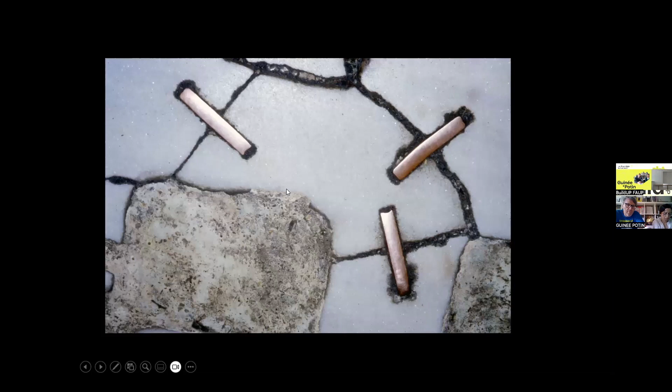After finishing school, we started to work in different practices that interested us in research and architecture. Excuse me. I worked for Christian Hauvette in Paris and Hervé with Edouard François. We began by working in architectural offices, and in parallel, we participated in competitions and we won several research awards with foreign residency grants, through Italy at the Villa Médicis.

These trips made us aware of the richness of vernacular and local architecture, and that in the end, we didn't know our territories in Western France very well. It was through traveling abroad that we became aware of our own territory. Those influences put together inspire our design through main ideas: mix natural and artificial, mix sophisticated form and rough form, mix hard and soft.

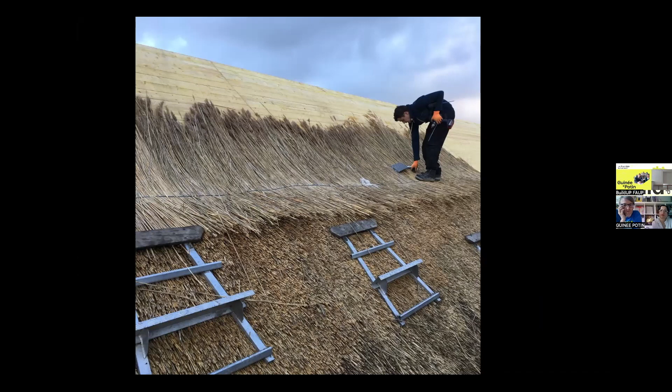The third project that we have achieved recently is a low carbon school in Saint-Pabu in the west of France, Brittany, which is entirely covered with thatch roof, as you see on the picture, with wood structure and wood insulation. That means the project is actually very low carbon and needs less energy to survive and to work, notably in the winter.

So when we think of building housing, we need time to test plan, materials, its properties, story, geography, and vernacular aspects. So we need that time, and when we think about building housing, it's the same when we build equipment, for example. We try a lot till we find the right one, the fitting one.

We're going to begin to present you three projects of collective and affordable housing. If we have time, we're going to begin a fourth one. It will depend because we have a lot of images to present, but I think it's okay with the time.

The first project is near Nantes, in Rezé, in the south of Nantes. It's a big project of 105 collective and affordable housing in the neighborhood called La Jaguère. The project is located in the new district of Rezé, in the south of Nantes, rich in a geographical location and strategic landscape. The challenge of the project is contributing to the writing of the identity of a new district, as you can see on this aerial view during the construction.

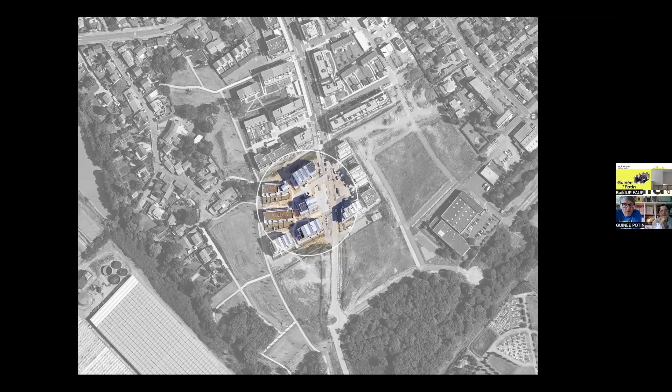On the west of the image, you can see a big greenhouse, and also a district of little houses, also on the west, and on the north, it's more collective housing. And in the mass plan, you can see that we have decomposed the project in 6 buildings. The project is composed like a hamlet, where residents move from the urban to the open countryside through notions of neighborhood life, private gardens, food space, and communal space.

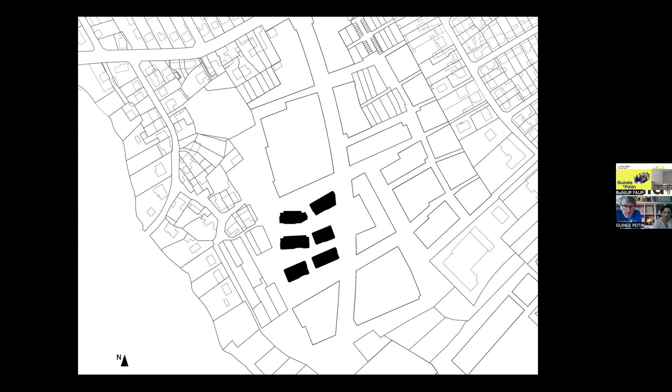And as an extension of the work of fine integration of construction in the topography, vehicle access in the block will be limited to reinforce the concept of undercover park and accompany the walker towards the large landscape. The aim was to eliminate the cars from the site and to let people walk on the landscape, and make the link between the urban part of the district on the east to the landscape on the west. The surroundings of the buildings become space for crossing, meeting between locals and visitors.

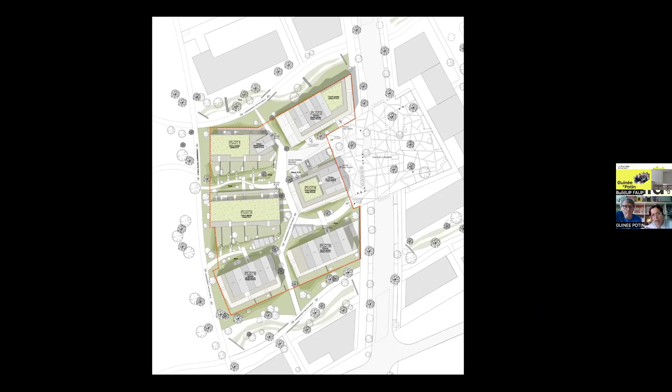So in the mass plan, you can see the 6 buildings, the place of the new neighborhood on the east, and the old district on the west with landscape and old village. Initially, the urbanist wanted the cars to go more inside, and we said no, we didn't want to do that. So there was a little fight, and finally we got the cars to stay on the outside and the pedestrians to stay inside.

Here is an image of the competition that we won, where you can see the alternance of stripes of building and stripes of landscape. That was the goal of the project. Given the large number of dwellings, 105, we have sought to achieve a low density by dividing the program into 6 small buildings so that the parkland permeates the plot. This subtle variation of size is accompanied by a volumetric composition alternating linear volumes with more compact volumes, so as to realize the programs without there being an immediate perception between free accession, affordable, or social housing.

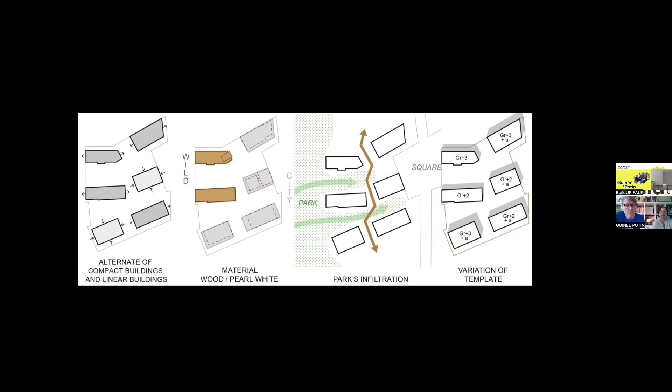2 materialities surround the buildings. To the west, 2 buildings in direct contact with the park are a wooden frame in Douglas. 4 buildings to the south and east, more urban, are covered with pearly white paint. That's the expression of the scheme that you see on the screen.

Here is the plan of the parking. We hide the car, and as Flore told, we hide the car under the building to preserve a natural park in the open ground, in the strip between the buildings, alternating built and landscape stripes. So we preserve the ground, and we can have very good plants between the buildings.

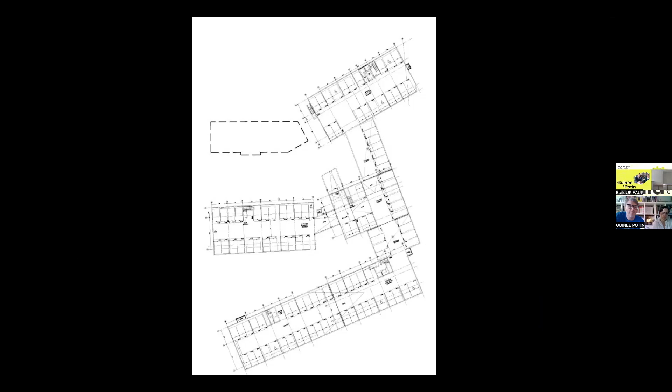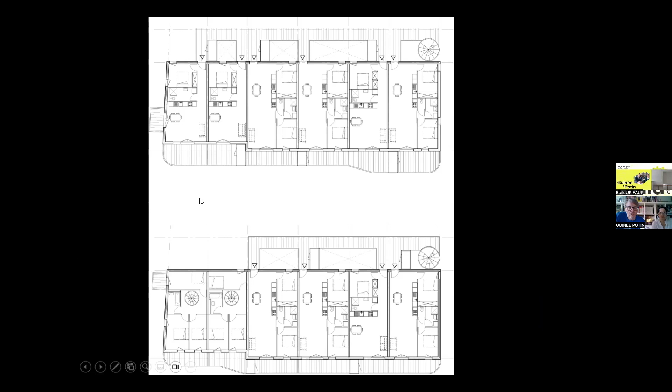We have varied the types of housing: duplex on the ground floor, walk-through or double orientation housing, attic houses, and so on. So this is the plan. You can see there are some duplex or double crossing homes. And there are also in the attic some perched housing that are like houses on the attic.

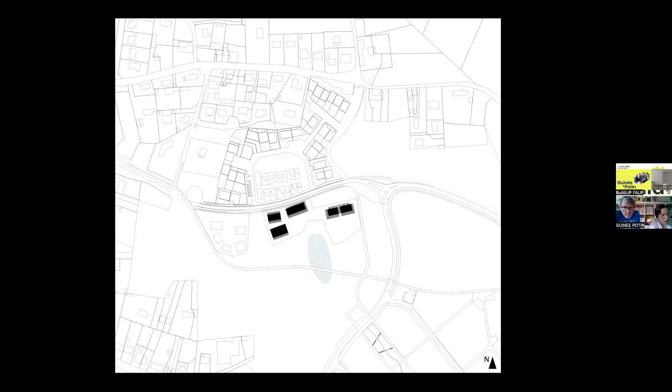A passive residence is a dwelling that is virtually self-sufficient in terms of its heating requirements. It can make do with solar gain, the energy released by occupants and domestic appliances, and very high insulation. The requirements induced by the passive house objective are numerous: controlled cost, detailed design, upstream collaborative work with all project stakeholders, etc.

These objectives can sometimes come into conflict with urban prescriptions and the urban planner. For example, at first, at the competition, we drew a more compact building, and they didn't accept. They wanted another proposition. So we made more fragmentation.

Here is the plan. We positioned the homes in the upper part of the site in 3 little buildings. At the beginning, we wanted 2, leaving porosities from the street to the north and to view the landscape to the south.

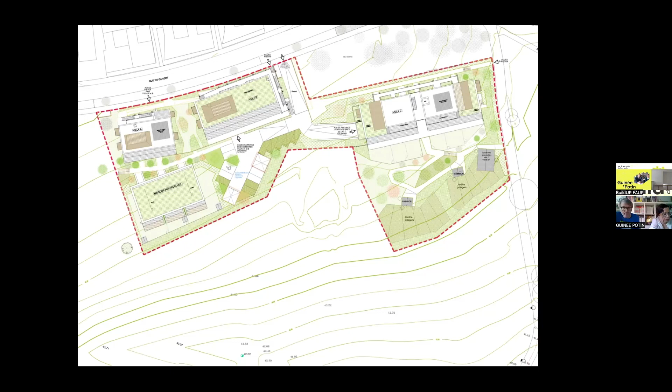Facing south towards the valley, the plot is positioned like a balcony opening onto a green view, making it an almost ideal north-south belvedere for a passive house proposal. We positioned the parking lots on the slope to hide them and placed the homes above them, overlooking the landscape with large outdoor terraces and also gardens.

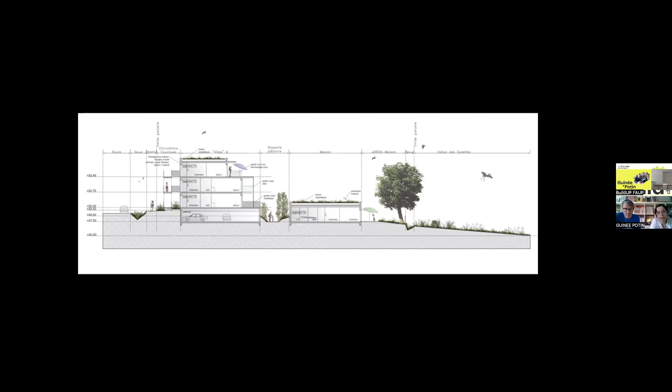All the flats are through-planned, served by a north-facing external passageway. This is a floor plan that we like to vary in our projects. You have seen the same in Rezé, as it allows us to have beautiful floor plans that are very open to the south and the landscape, and offers walkways where residents can cross paths and meet each other.

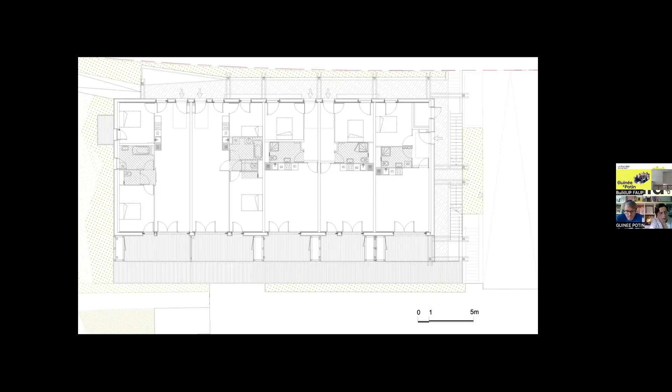Compact transversal massing of apartments for natural ventilation via openings on opposite facades. Double flow ventilation to recover internal heat. Passageways and balconies are made of wood and metal, uncoupled from the primary structure of the building to avoid thermal bridges. The idea for the housing was to offer something unconventional and accessible, like superposed houses with generous outdoor spaces.

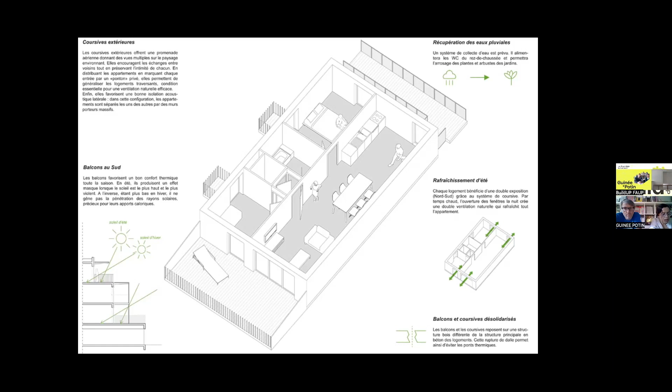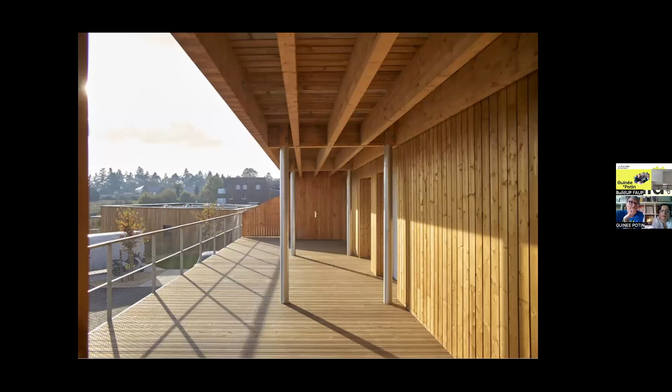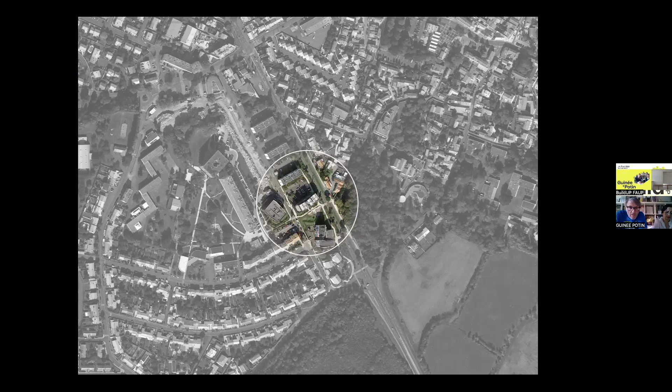So today the target of the urban renewal project, because it's a district in deep crisis, is to participate in the construction of the neighborhood's new identity regarding its rich social history and strategic location. Several projects are already achieved, contributing to start transforming the area.

The plan was also given by the urban planner, and the urban renewal project destroyed one of the existing blocks to develop a new project divided into plots.

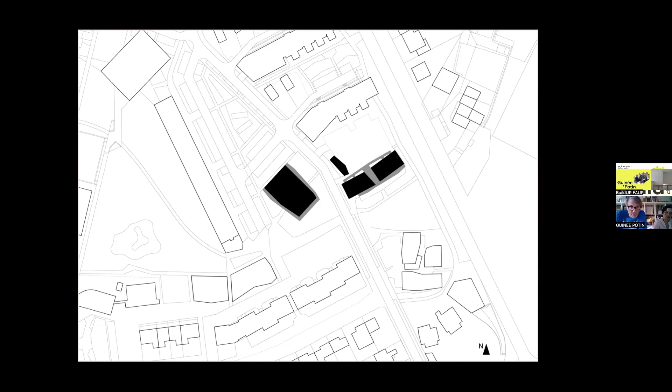This 64-dwelling project, divided into 2 buildings, is implemented in the heart of the residence Pierre Loti, completing an urban renewal. As a consequence, the process aims for a volumetric transition. A differentiated answer is given for each building in order to make the most of their respective potential. On the east, the R building, through the shape of its roof, floors, movement, and volumes, assures a gradual transition and a new link towards the city center.

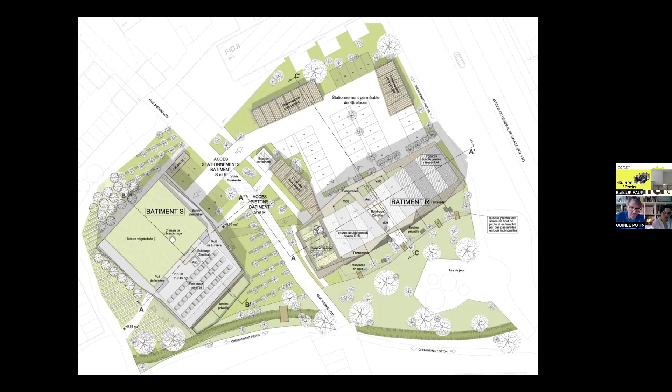On the west part, so the left of the plan, the S building, facing the most imposing form of the existing buildings, offers in response a more compact monolithic volume. The two constructions offer the passerby a sequenced facade, horizontally with long terraces and vertically with entrances and vertical flows inside the building, designed as rifts, as you can see on this aerial view, with the 2 buildings that are different but also homogeneous with the treatment of the long terraces enveloping the facade.

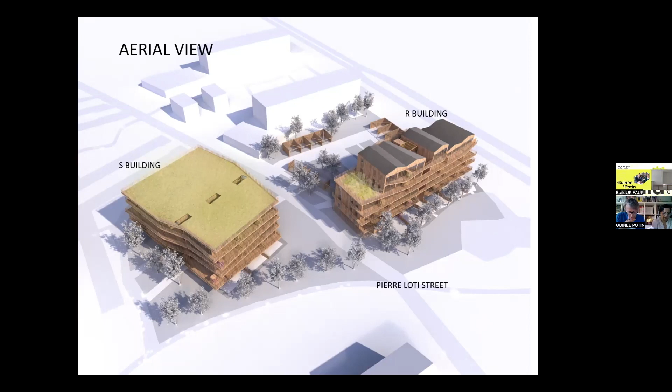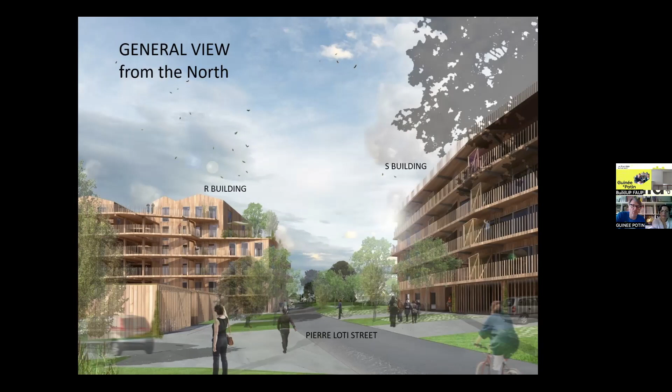The project highlights ideas of appropriation and habitability with a wish of giving each dwelling a nearly private access. These were images from the competition. And from the north, you have the R building with walkways and the S building, which is more compact. On the ground floor plan, as you see on the screen, the dwellings are accessible through individual entrances and an enclosed private garden for each apartment, with a direct way out to the orchard and the landscape. The 5-room apartments are organized as duplexes, giving the dwellings a real shape of detached house.

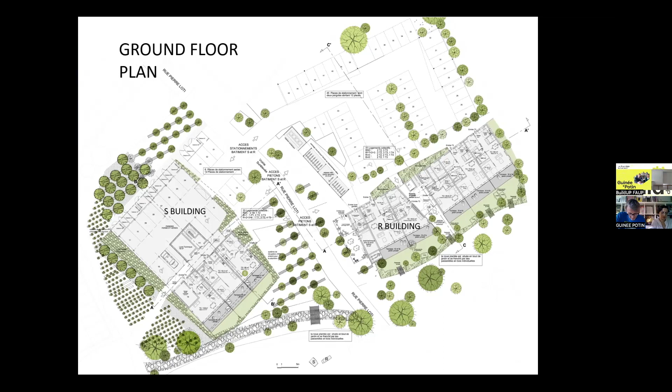Here is the same plan of the ground floor. For this project, the cars are not under the building but are outside due to the low budget that we have. There are a few cars below the S building on the ground floor, but the majority of the car park is outside due to the low budget.

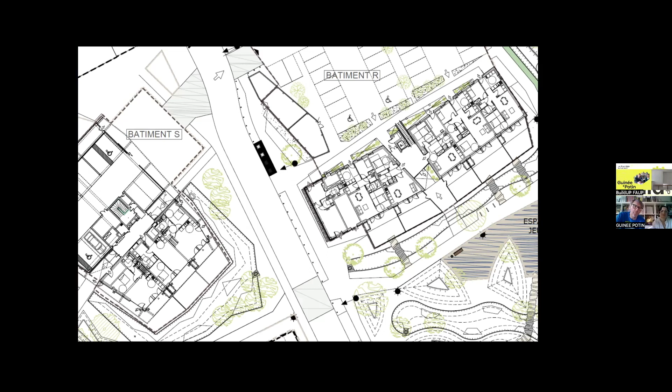Firstly, the dwellings were sought and conceived from the inside in relation to the surrounding nature. Every dwelling is dual aspect or double oriented, and each space is designed to benefit from natural lighting and views. Most of the dwellings are composed of 2 parallel parts with a clear separation between day and night space. The daytime dual aspect part includes entrance, kitchen, living room, terrace. The nighttime part contains bedrooms and damp rooms.

In the R building, as you see on the screen, the path reinterprets features of individual housing into the apartment block: passing through a fence, pushing a barrier, following an alley, taking advantage of the landscape, and entering the dwellings through a door directly open to the outside. Outdoor corridors allow a narrower walk, offer numerous views, and support neighborly relations. This bridge establishes a gradual distance between public and private space. In addition, displaced accesses to the entrance preserve the dwelling's intimacy from the traffic. The outdoor corridors give access to the dwellings thanks to private footbridges.

I'm not sure if you can see the plan precisely, but you can see the dwellings are composed of 2 parallel parts. I repeat, with a clear separation between day and night space.

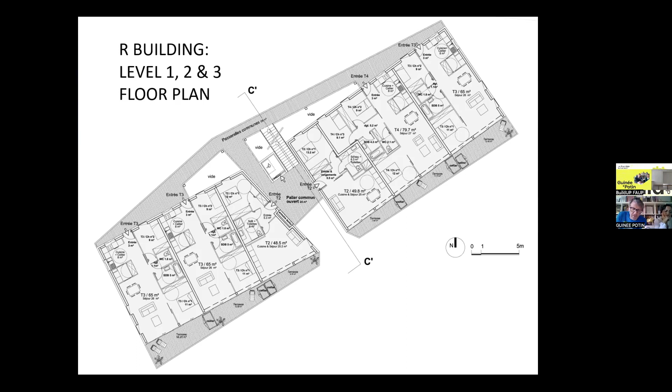In the S building, which is more compact, the density of the construction and the efficiency of the distribution, 8 dwellings per floor, implies precise work regarding natural light input in each space, and especially in the communal areas. The path invented for the residence starts in a dual aspect hall, north-south oriented, completed with a northwestern fragment. This cutting up in the building allows the creation of clear views toward north, south, and west in shared spaces bathed in light. You can see on this plan the complexity and the efficiency of the plan, but also the way we cut the plan to bring natural light to the entrance.

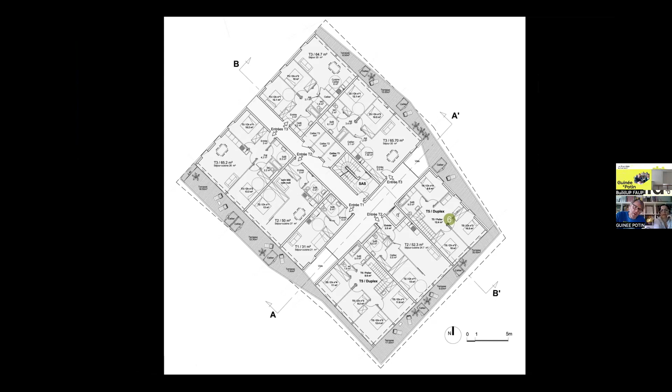From the outside, the facades are entirely glassed, making it difficult to imagine the interior and to distinguish between the bedrooms and the living rooms. That was for us a voluntary architectural choice, not to have the distinction between each space inside and to make as much glassed facade as possible.

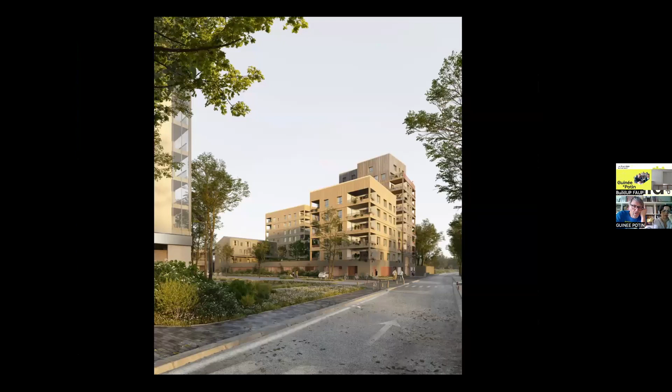So here is our project with different variations of volume, and on the ground floor, it's the car park. So each apartment begins on the first floor until the 10th floor, which is going to be quite difficult because we studied it in a wooden structure with a straw insulation. I finish with this detail. It's quite important to us, and how we're going to make this approach.